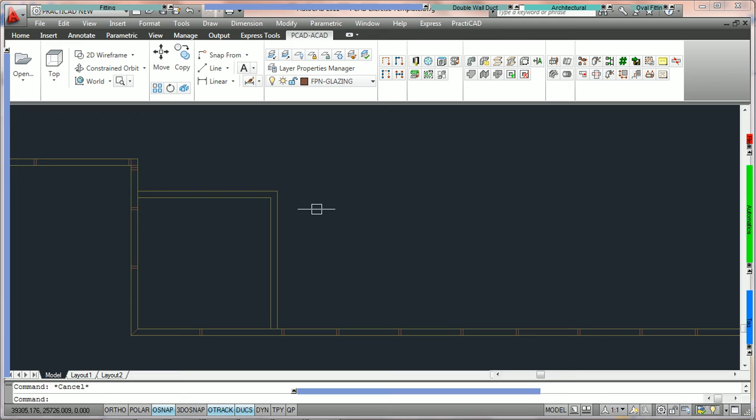If you are picking up from the exercise on walls, right now you should be at the section where you've just got the walls we've traced. And what we're going to do is unisolate the drawing to bring back all of the details on the template. To do that, we're going to go into the Home key, and we're going to go into the button that says Layer Unisolate. When you click on that, it's going to bring back everything on our template.

You can start this exercise fresh. Just draw a wall or a room that's 10 by 10, 10 foot by 10 foot, and then you can pick up in this section. The first thing we must make sure to do is that we have the custom ceiling grid in our architectural bin. You can see here I already have it.

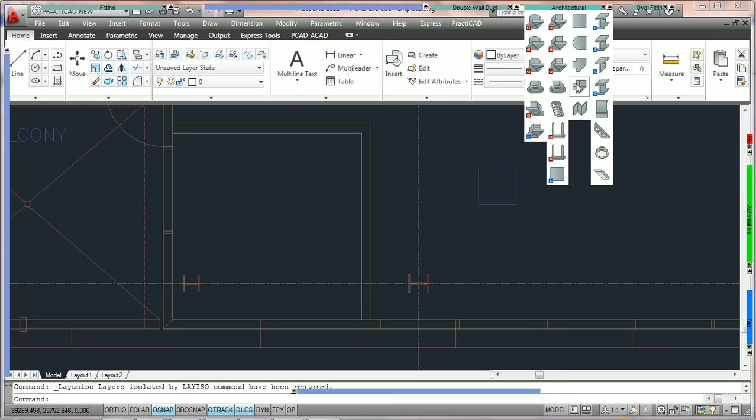If you do not have it, you must go into your PractiCAD ribbon. Go into the library icon. We're going to click on it. And on the left-hand side in the architectural section, we're going to go down to where it says ceiling grid. So we want to click on the plus key over here to open up architecturals, and then the plus key next to the ceiling grid. And then we can see the three types we have.

This exercise is only going to go over the custom. The custom is the only one that I normally use because it's the most flexible. Custom ceiling grid, like custom walls, can mimic the rectangular and arc ceiling. So generally we only need one. We're going to click on the custom ceiling, and that's going to highlight it in blue. And when that happens, you're going to notice that the architectural bin is going to be open.

If we don't have this icon there, we're going to hold down with our left mouse and we can drag it and put it right here. Since I've already got it on my desktop, I'm only replacing it with the one that's already there. You can only have one entity at a time in a specific bin. I cannot have two custom ceiling grids. So once you've got it in your bin, you can exit out of the library. So we want to start off this exercise with the custom ceiling grid ready to go.

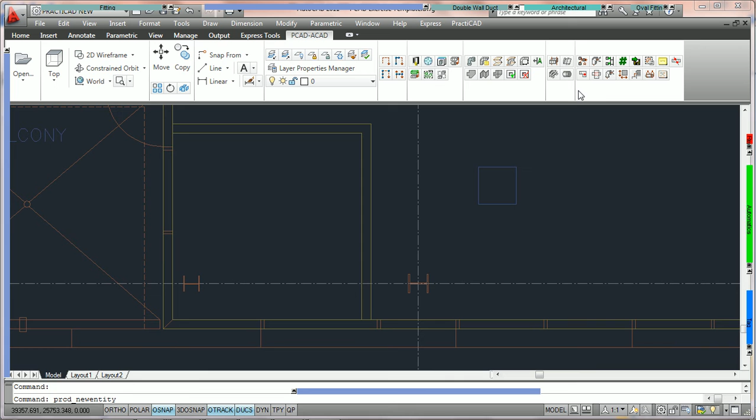The first step is to go into the architectural bin, click on the custom ceiling, and go over to the item box. You want to set your tile length and width to 24 by 24 so that it's a 2 foot by 2 foot. The remainder of these parameters we can adjust at the end of this exercise. But what we're going to do is go into the elevation box and put in elevation 10 foot. This elevation is basically the top of the walls we drew. We drew 10 foot high walls. We want to get the ceiling grid's elevation close to where those walls are.

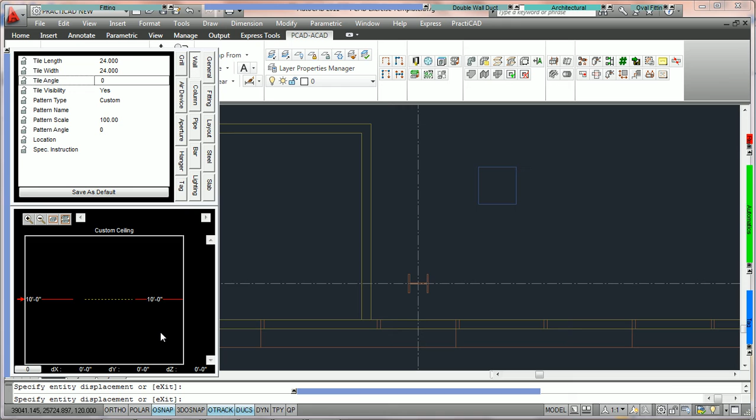The reason why is those walls have nodes or object snaps on the top of them and the bottom of them. So we want to make sure that the ceiling grid is snapping to the right elevation. There are exercises and tutorials working with the nodes for columns, and they explain why you sometimes have nodes that are stacked. A general rule is always keep the elevation a little bit higher when you're going to snap to something. If we want this grid to snap to the top of the wall, just make sure our current elevation is higher than the wall's height. So we've got it set at 10 foot.

Now what we're going to do is click on the drawing to get our drawing space back, and we now need to click once. You can see in the command line it says specify entity displacement. Now I currently have my object snaps on. You'll notice that object snaps on. I'm also going to turn polar tracking on. It's not necessary, but it helps.

And what we're going to do here is click once to start the ceiling grid. Then we're going to click twice. Until you do 2 clicks, you're not going to see PractiCAD generating the ceiling grid. Once you've got 2 clicks, you're going to see it drawing. Then we're going to click on the 3rd corner point, and then we're going to come over to the 4th corner point, and here we're going to click once.

Now, once we do that, you should notice that you still have control of the grid, and it's waiting for another point. If we don't need to draw any more points, and we know that we just want PractiCAD to complete this grid, we can hit enter here. And PractiCAD is going to draw a straight line from the last point we clicked on, which is here, to the first point we clicked on, which is here, even if my cursor is all the way over here. Once I hit enter, it completes the grid.

Now the command line says specify the offset or center. Notice that it's asking us, do we want to center the grid in this or do we want to offset it? If we hit C spacebar for center, it's just going to center the grid, and it's going to make it so that all 4 corners are equal. However, in this exercise, we're going to offset the grid.

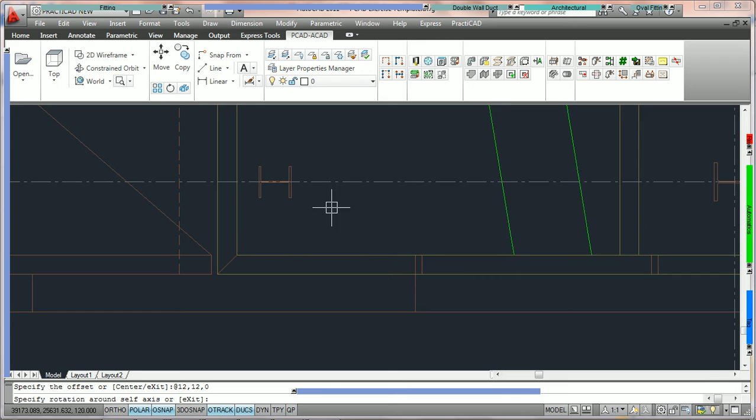So I'm going to type in Shift @ and I'm going to type in 12 on the X, 12 on the Y, 0 on the Z. Please take note in the command line: I use the @ symbol, 12, 12, 0. And now we're just going to hit enter. When we do that, it should have the corner point. You can see it pivoting. It's exactly 12 and 12.

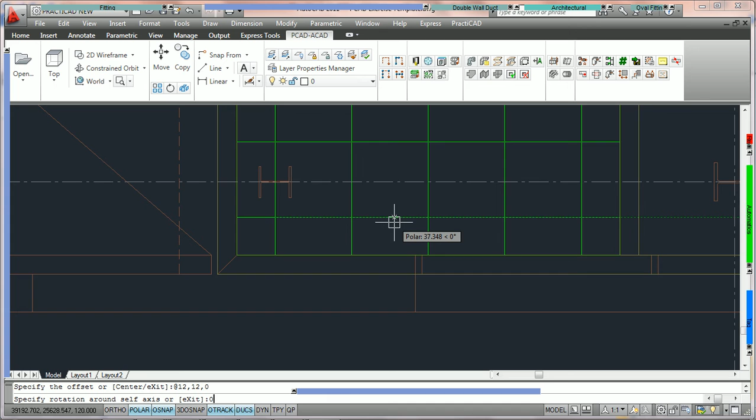And now it's going to ask you for the rotation. Here we just want to keep it rotated at 0. So I'm going to either hold the polar or you could type in 0, enter. Before you do it, take a look at the specify rotation in the command line. Always watch the command line when you're doing stuff for the first time. This way you can see PractiCAD's always telling you what section or what command's coming up. So we're going to hit enter, and now we've got the grid placed. So that's placing down a ceiling grid.

Now, once you've done that one successfully, let's scroll up to the other part of the PractiCAD exercise template. Here we've got a grid, which is 24 by 24, but it's not a perfect square, and it's also rotated a little bit. So we're just going to draw another grid. We're going to go into the architectural bin and grab the custom ceiling again.

We're going to click once. Then we're going to start from this corner point here and click once. Then we're going to go to this corner and click a second time. And then we're just going to go to the third. You're going to trace the outline of the entire grid at each corner point.

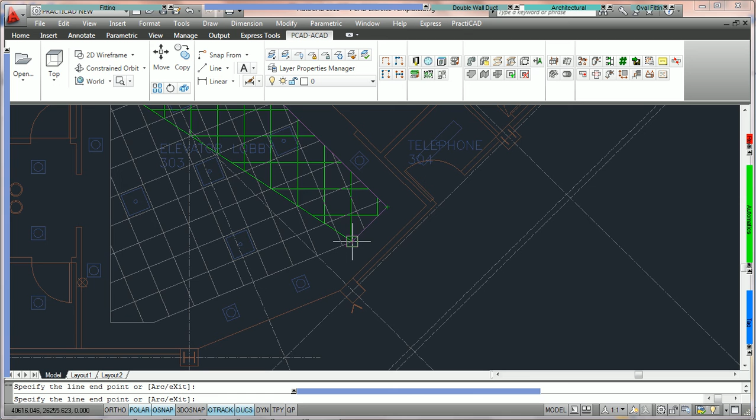And once we get to the last corner point right here, I'm going to click, and notice once again, I want it to complete the grid. So I'm going to hit enter. Now, as we move our mouse in a circle, it's asking us for the offset.

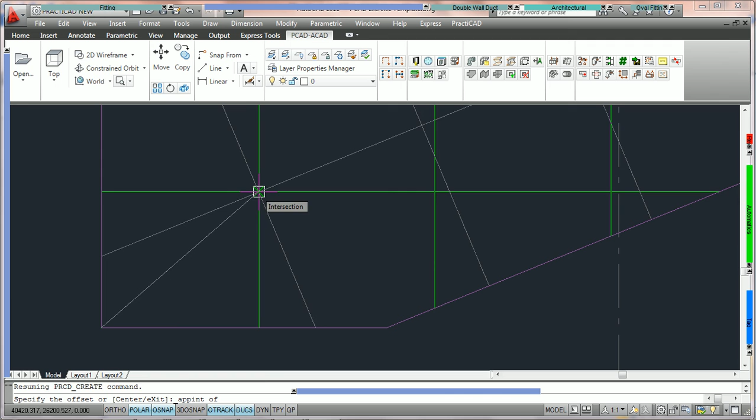And what we're going to do is zoom in to this corner point here, and we're going to highlight that spot. And to do that, I'm going to shift right click, and I'm going to grab the apparent intersection snap. And that's going to make it real easy. You see the intersection? I'm going to click on that point right there and click once. Now when I do that, we know that the offset for our tiles is going to be correct.

And it should be saved at 24 and 24. Take note that I've got the tiles at 24 and 24. If you had not saved it as a default, you might not have the tile sizes correct. So make sure that you do have it as 24 and 24.

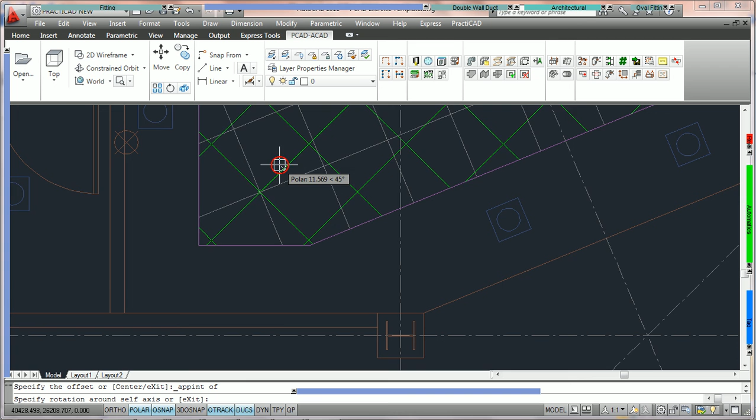Once we've done that, I can specify the rotation angle by simply holding at another point on this ceiling grid background, at the perpendicular. See, we're just going to hold it right here, and then we just click one more time. And when we do that, we've successfully laid a PractiCAD ceiling grid directly over the 2D template.

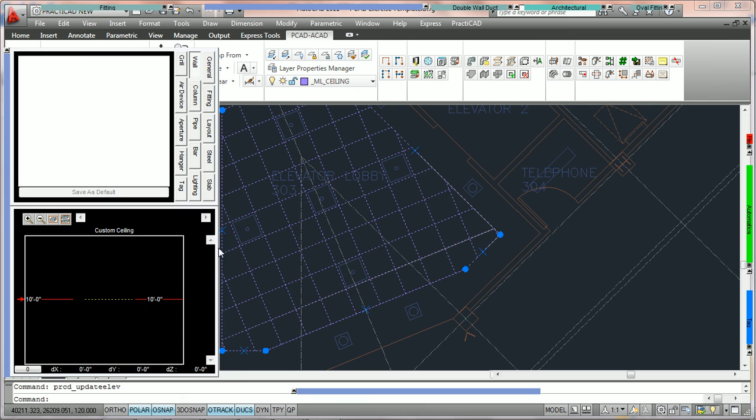What we can do now is we could click on our ceiling grid, and we could come over to that elevation box, and we can give it a 10-foot elevation if we'd like. Okay, and once we've done that, we now have a ceiling grid we could snap our GRDs to. And you'll know if you did it correctly because we can put it in isometric view, and you'll be able to see that you should have your wall or your ceiling grid here, and over here you should have the ceiling grid as well.

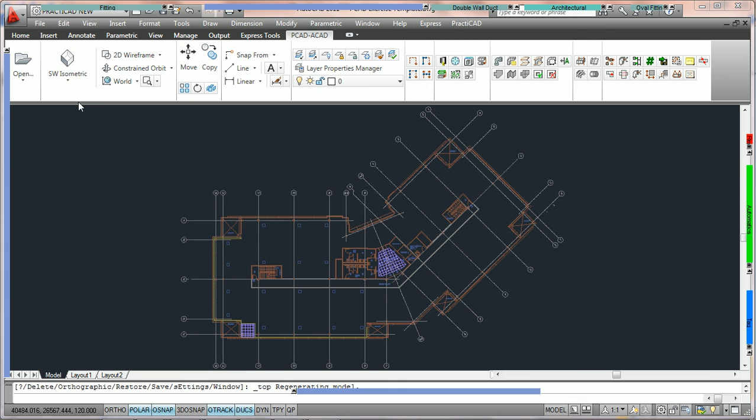And one other portion we could show real quick in this exercise would be just placing a grill on the ceiling grid. And to do that, we're just going to zoom back in to the bottom left corner of this drawing right here. And we're going to go up to the architecturals and just select any grill. I'm going to grab grill supply, and I'm going to click. And I'm going to come over to the item box and notice that the grill tab is checked.

And what we want to do right here is make sure we're holding this grill by the Z bottom. Hold it by the Z bottom. And we don't need to worry about elevations anymore, because if we're using our ceiling grid, the node is going to snap this grill right to the grid. And there's separate tutorials on that.

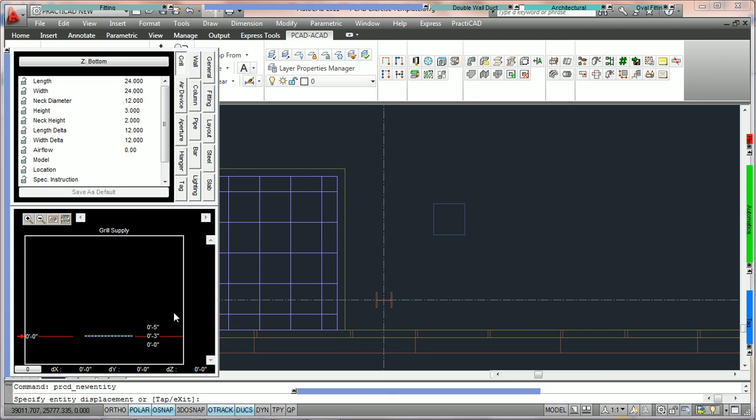And what we're going to do here is just click on the drawing. And if you've got that node object snap checked, you're going to zoom in, and all you need to do is bring your crosshairs just above one of the midpoints of the tile you want to attach to. Notice as you move your cursor around in a circle, if you move it on the line, it's going to jump. If you move it just a little off the line, it's going to highlight here.

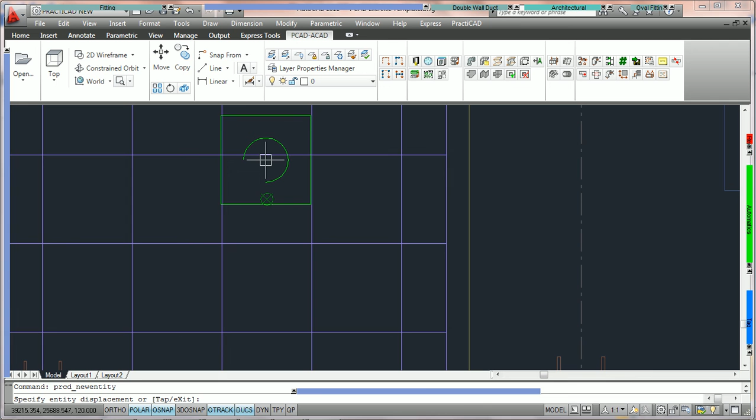You don't want to grab the corner node, as you can see. You want to make sure you're at one of the midpoints. And once you see that node, you're going to click. And that's going to put the grill right at the proper elevation because you're using one of our grids. That's going to conclude the tutorial or the exercise on the ceiling grids, working with the walls and working with the grills on top of grids.